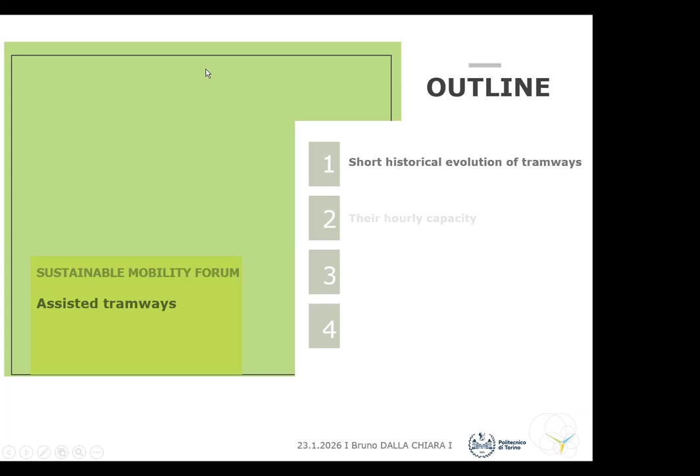First, a very short historical evolution of tramways. Then, as typically in the transport domain, their hourly capacity, then the characteristics of the system, the infrastructure, the rolling stock, and the operation of trams. Last but not least, the recent innovations and latest developments, with a particular focus on energy consumption.

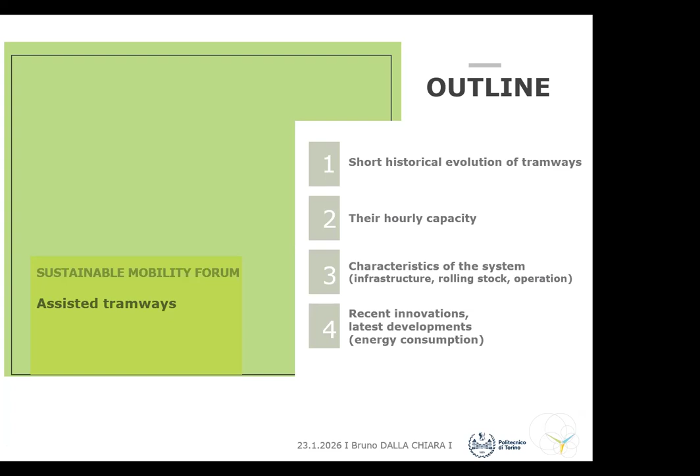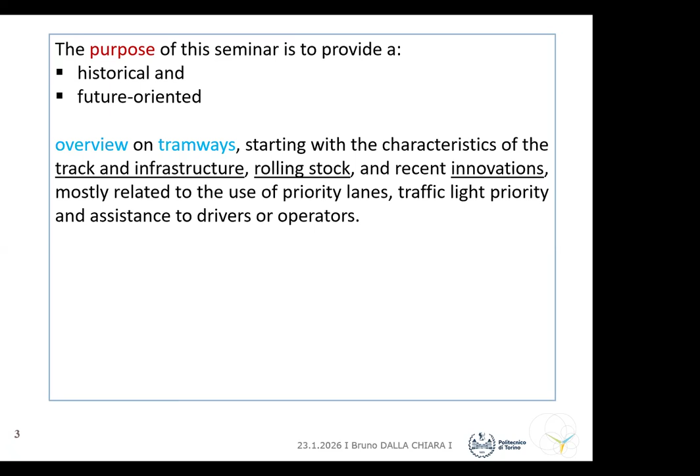So the goal is summarized here: historical overview and future-oriented perspectives, then an overview of tramways starting from the characteristics of the track and infrastructure, then the rolling stock and innovation, the hourly capacity, and some developments.

So let's start with the capacity, and then I will look at the historical aspects, going back to capacity afterwards. This is a slide that I already showed in the seminar concerning automated metros.

Typically, tramways extend for some kilometers, and to obtain the hourly capacity it's very simple, as you most probably know. You have the capacity of a single tram, typically 150, 200, 250 passengers or a bit more. Then you know the frequency, or time between two vehicles, and you multiply the capacity by 3,600 and divide by the interval in seconds to obtain the hourly capacity value.

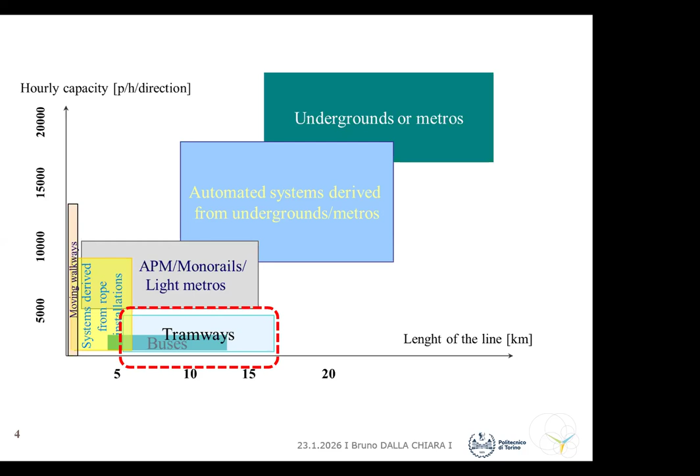That is typically between 1,000 and 2,000, could be a bit more. Sometimes you overlap services, and it seems, from one point to another in the city center, that you have 3,000, 4,000, 5,000 passengers per hour per direction of capacity, but that's apparent, because a single line can only reach around 1,000, 2,000, 2,500, or a bit more.

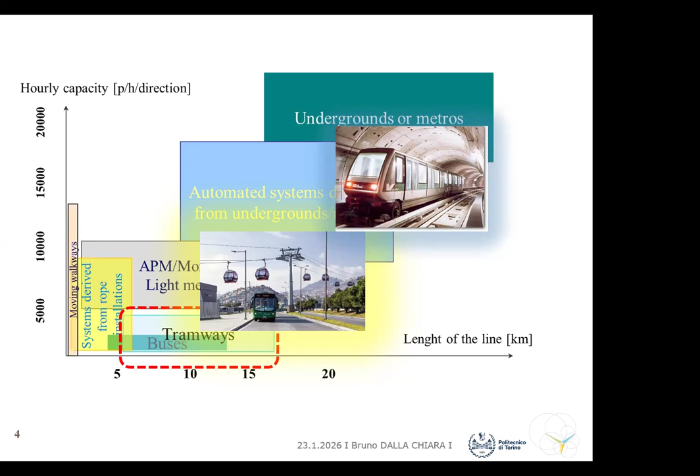Given that, if you want to increase that hourly capacity, you can go in the direction of urban cableways, which you have already seen, or above 8,000-9,000 passengers per hour per direction, automated metros. So more or less you can cover, with fixed systems, the typical hourly capacity of a great number of European cities.

As regards history, the first trams were already in operation in the last 20-30 years of two centuries ago. This is an example, and I will make a number of examples coming from the city where I live, which is Turin, because there is a history and also an evolution.

Within this history, what I want to underline is why tramways were introduced. Well, because the roads were not smooth, they were not planned, they had different irregularities. The proposal was to place rails to have a more regular travel and reduce friction. This could help horses, which had to pull the trams, reduce their effort. This brought, in those years, the development of some urban networks.

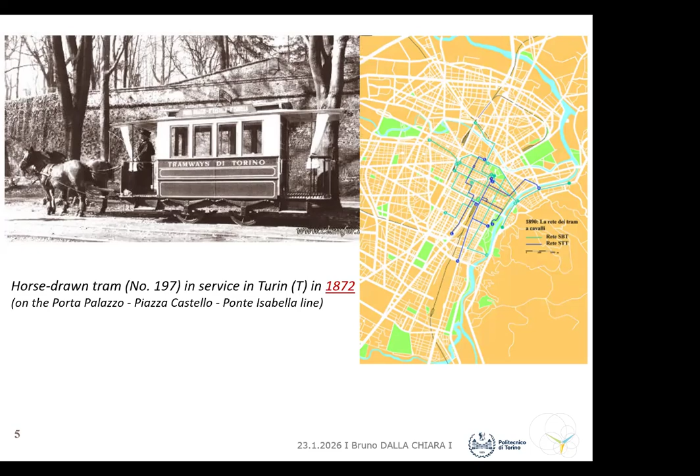This is the one in Turin, a network that in the 1890s already operated with horse tramways, or tramways pulled by horses.

And then afterwards, at the end of the two centuries ago, electrification started. Having rails could help, because you could place the electric line and collect the electric current with a pantograph. So comfort, reduced rolling resistance, and the base for electrification were the foundation for the development of urban tramways.

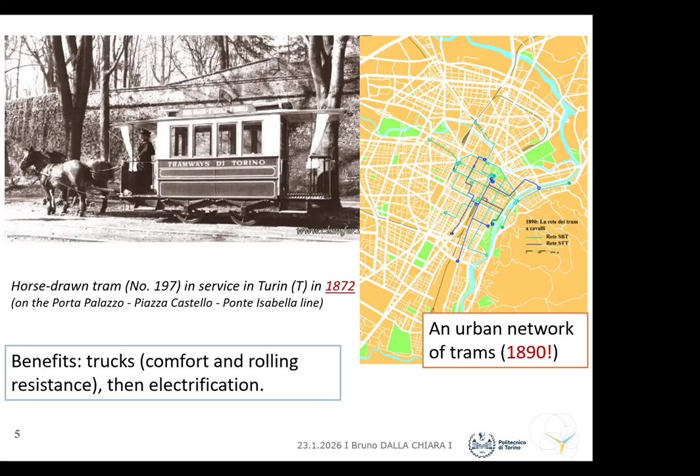Many years, some decades have passed, and nowadays we speak of both traditional, conventional tramways and fast tramways, where the typical features of fast tramways are segregated lanes and, as far as possible, traffic light priority.

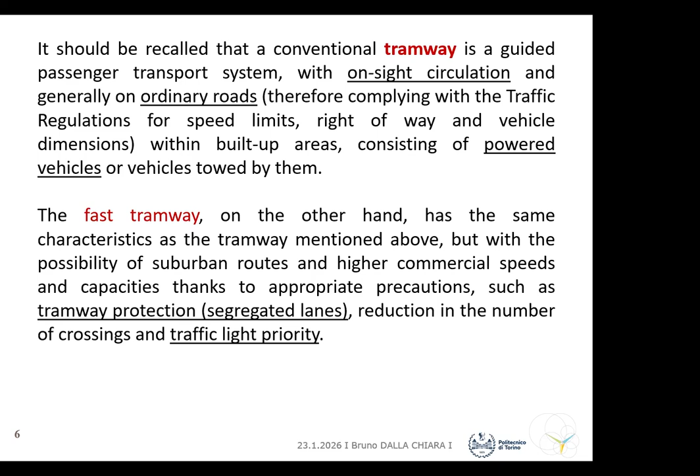Given that, there are a number of technical standards, mainly referred to CEN, the European Committee of Standardization, Comité Européen de Normalisation, which partially share the same rules or technical features as railways, but typically the technical standards concerning tramways are specific to tramways, and that's all.

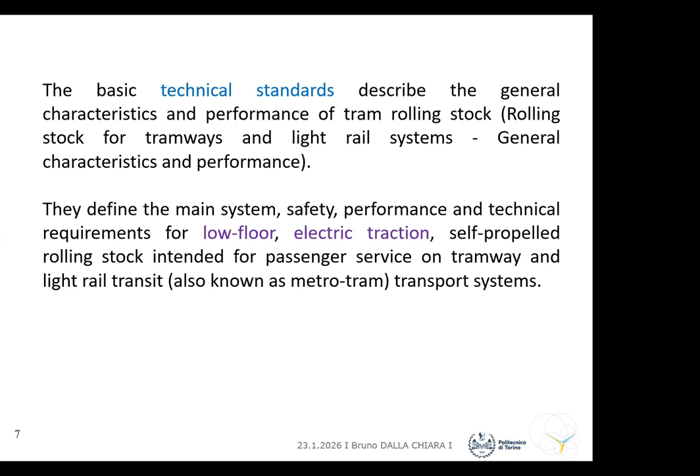They concern low floor, electric traction, and resistance of the vehicle, which we will see soon. So I've summarized this so that if you have to deal with tramways, you know the basic technical terms.

So I've summarized all the European standards concerning tramways. Some of them, as I said, come from railway application, but with specifications for trams. I won't list them all, but I'll just mention there is a standard concerning tram vehicle layout, then displays, controls, indicators for tram vehicles, and design for trams and light rail vehicles.

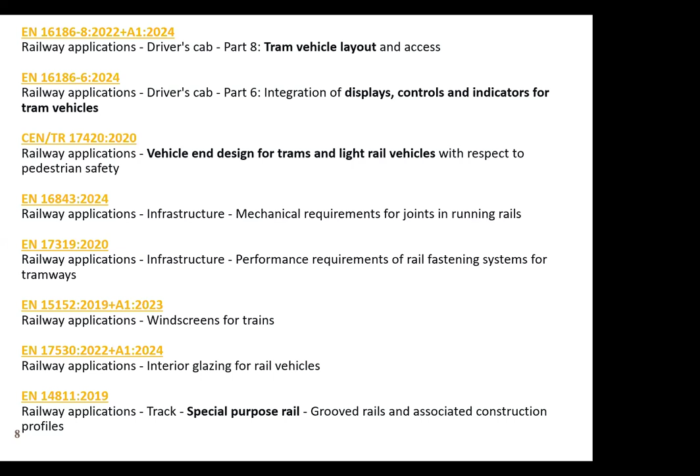Then something related to the mechanical requirements for joints, the performance requirements for rail fastening, windscreens, interiors, special purpose rail within which there are grooved rails for the tramways. And then there are some technical standards concerning switches and crossings, urban rail application of railways, also for the tram train applications, of which I will tell you something later.

Then a communication device for urban rail, the track during the work, and last but not least, MaaS, Mobility as a Service, which has a standard NeTEx, which includes also the network and timetable exchange for trams, for knowing what is the supply of services of tramways together with all the other urban services.

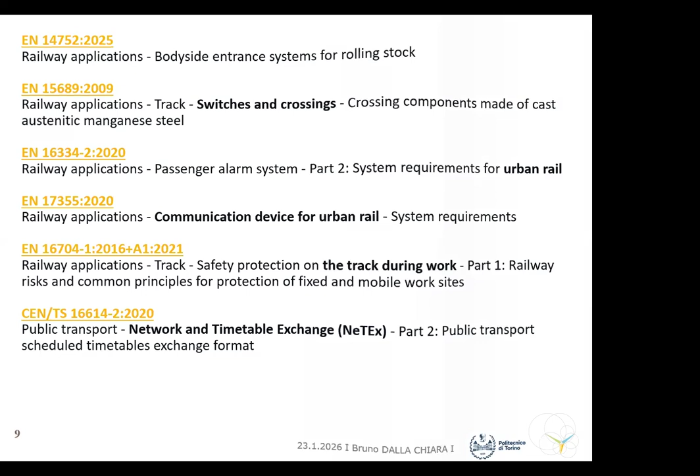So this is the list of technical standards concerning tramways. There is a consolidated literature and consolidated standards. Given that, let's see first of all which are the main strengths of trams. Then we will enter into more technical aspects.

The strengths are, well, the hourly capacity is interesting: 1,000, 2,000, 3,000 passengers per hour per direction, as I said before. And it's much more attractive than conventional buses. And if you have a segregated lane, this guarantees, to a certain extent, that you can maintain that hourly capacity without the influence of traffic flows.

Then, of course, the regularity of the lane, having some rails at disposal, guarantees the passengers can carry on some other activities like reading, like using their smartphones or whatever, while traveling. Then the frequency - if you have enough drivers and a good network, then you can guarantee a regular frequency of the service. That is something interesting.

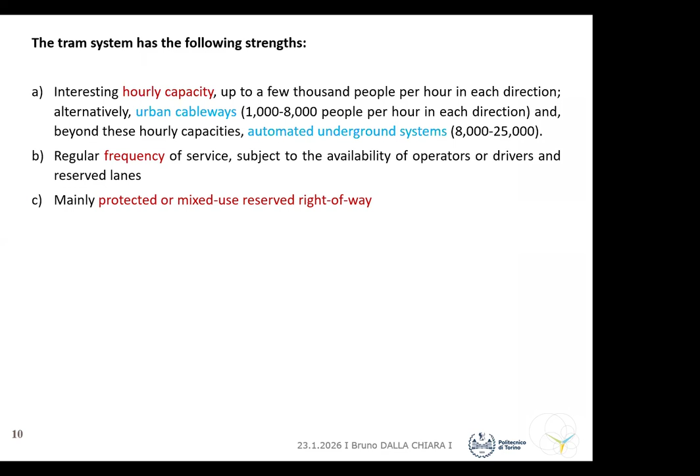Then you typically, well, cities typically aim at protected or mixed-use reserved right-of-way, so segregated lanes. It doesn't produce local emissions because all the tramways nowadays, typically or nearly all, have an electric line. Well, there are some tramways with rope traction, as you may remember from San Francisco, or some specific application, but typically they are all electrified with an electric line and a pantograph.

And then typically an easy accessibility and a creation of a positive network effect, because you can have switches and you can cover parts of a city. Then you might have an effective traffic light priority, of which I will speak later, and this guarantees a higher, typically commercial speed.

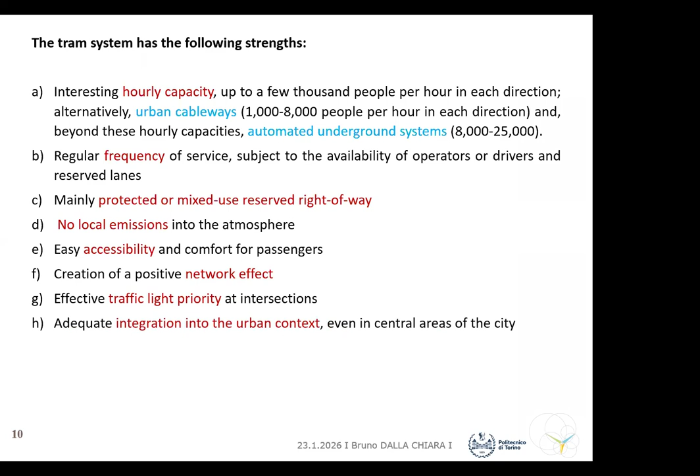Then you can integrate the tramways with the urban context, especially in the central areas, as we will see later. And typically you have segregated lanes as far as you can with a clearly visible route, therefore less risky for pedestrians. It's not always like that, but could be.

And then you have the possibility of recovering energy during braking, though it's not so easy for tramways as for trains. We spoke about that when dealing with automated metros. And anyway, you could do it and part of the energy will not be lost.

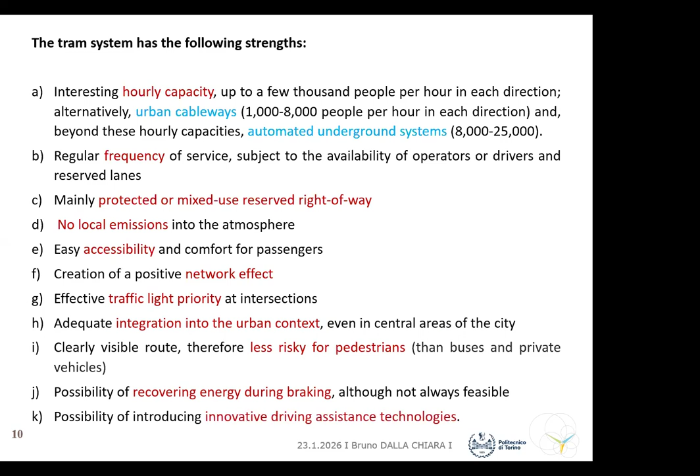Given that, let's start from the infrastructure. Maybe you remember that the typical standard gauge of railways is 1435. That is the normal gauge that was inherited from Stephenson at the beginning of 2 centuries ago. But the tramways have not the same railway gauge.

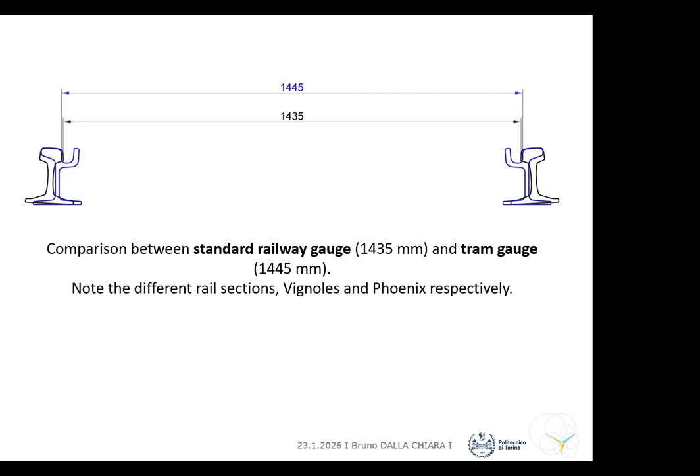As regards the running track, we have various gauges apart from the standard one that we have just seen before. So 1445, I go back, this one. Okay, apart from that, we might have the narrow gauge of 760 millimeters and pseudo standards.

Typically, we can have very reduced radii. Consider that in railways, typically the radius of a railway line has a minimum of 150 meters, but this is not typically accepted along the infrastructure. And normally we have railways with more than 250, 300, 350 meters of radius. In the tramways, you can reduce that, given also the kind of infrastructure you have at disposal.

Then you can have a gauge widening on curves, typically on very narrow curves. Then you avail yourself, the line can avail of switch points, and you can activate track switches from on board, typically of the vehicle. The rails are Vignoles or Phoenix, and we will see later, typically grooved.

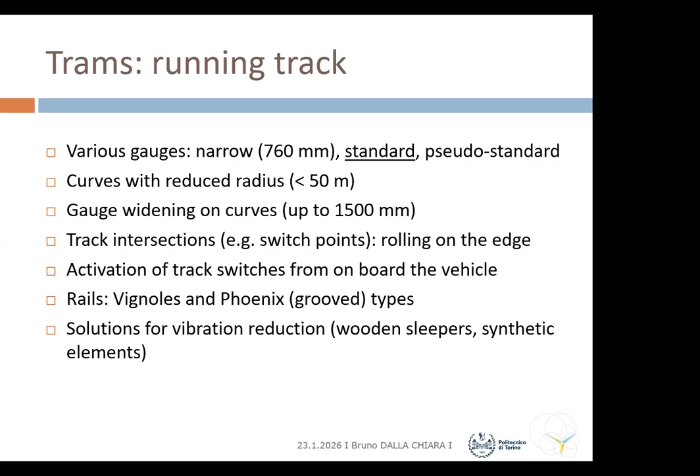And there are solutions for reducing the vibration, typically wooden sleepers or synthetic elements for absorbing vibrations. Here, sorry, there are some slides that are in Italian because I use them in my courses, but though some of them are in English, but these are in Italian. These are typically Vignoles rail.

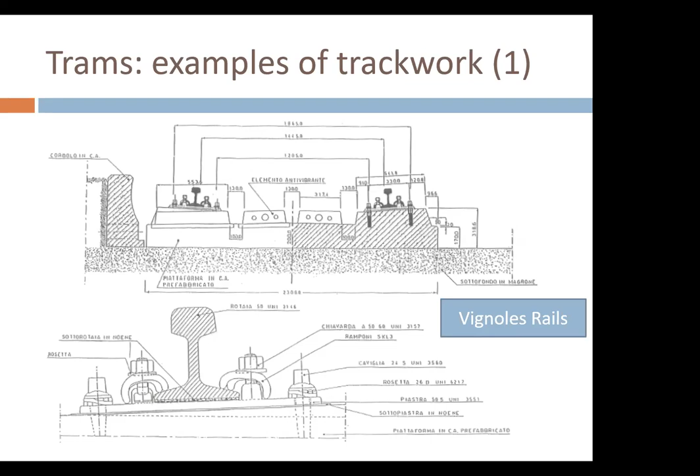What I underline is that you have, as you may distinguish underneath the rail, an element for absorbing the vibrations, or in between the rails, as you can see here. As regards this application, it is very similar to the railway one.

As regards typical tramways application, we have Phoenix rails like this, and they are much applied in many cities. As I said before, they are very good for very narrow curves because the body of the tram remains there and cannot get outside unless for unexpected conditions of dynamics.

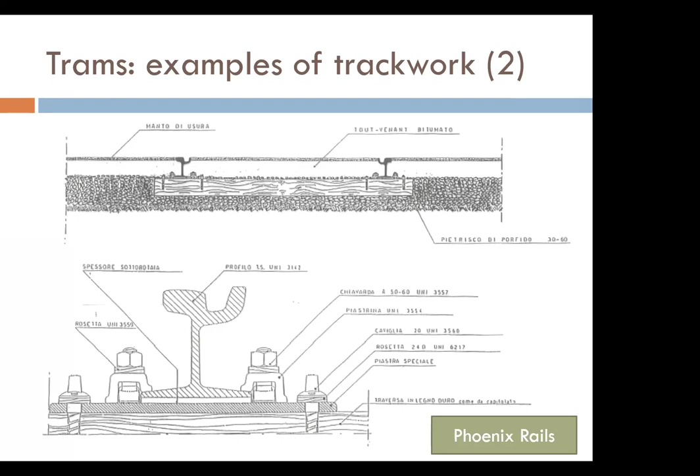As regards the layout of the track, here I have reported some designs and sections of possible lines in the city. You can have the tramways close to one another with the electrification on the extreme parts of the carriageway or in between. Or you can have the carriageway where the tramways run in one direction and the other at the extremes, with the lanes for cars or passengers in between.

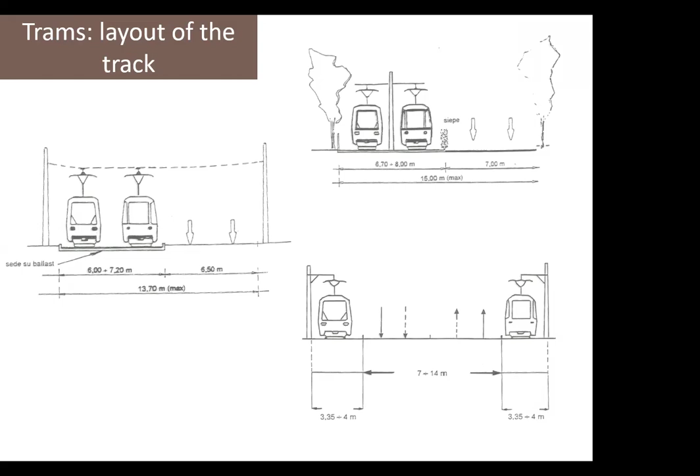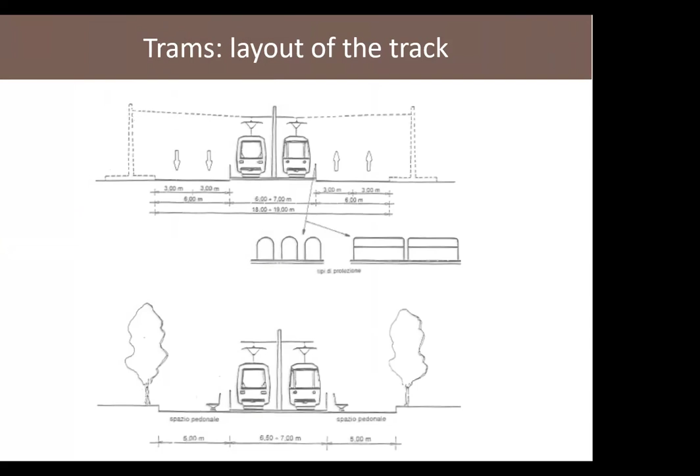Or you can have it in between, but in a specific context, typically where you have passengers apart, like in the picture below. So you have parking areas or areas where people typically walk, and the tramways in between.

As regards the rolling stock, in the world, conventionally, we have three types of trams with 2 bogies, 3 bogies, and 4 bogies. Only recently we have longer trams, up to 6 bogies, but the conventional ones are typically these. A little tram typically has 2 bogies, like the one on the top left of this slide. Or you can have a 3 bogies tram like in the bottom part, or 4 like in the real bottom part of this slide.

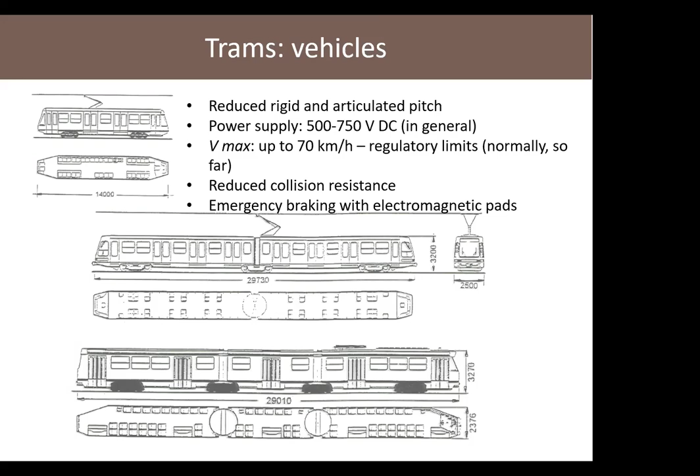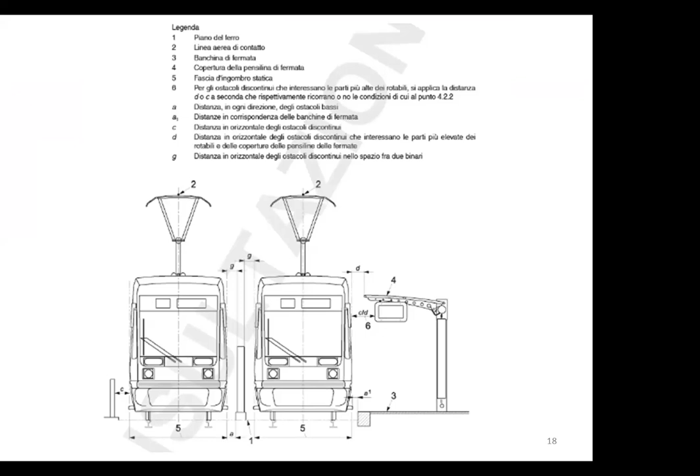But tramways normally have them, because they work and operate in the city. Here you have a section of line where you can distinguish the pantograph, the section, and the front and rear of the tram. Let's see some pictures, and then we will go towards the technologies.

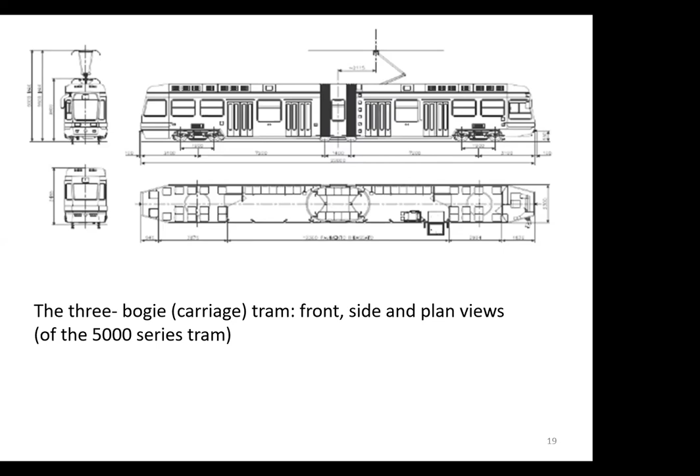As regards the pictures, here you can see a 3 bogies or carriage tram, with the front, side, and plan views. Forget the number here, it's just an application concerning Turin and some other Italian cities. You can distinguish that typically you have 2 pieces connected together in the intermediate part, and the bogies that you can see there. The number of doors depends on the kind of design.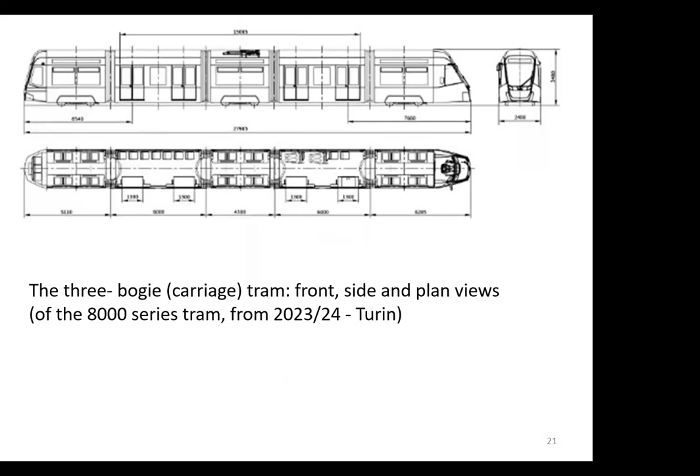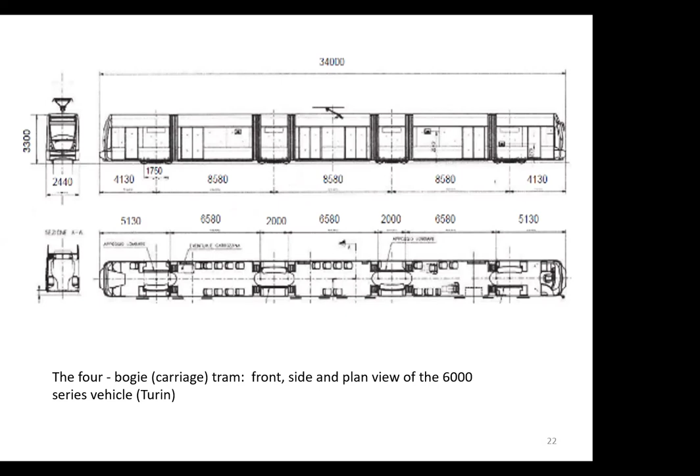Here you have another 3 bogies tram, again a similar concept. And another one. This instead is a 4 bogies tram, which is normally the longest one, apart from some very recent experiences that we will see shortly. In a tram like that, you can host something like 250, 270, even nearly 300 passengers, so you can easily calculate the capacity given the time or the headway between 2 trams.

More recently, the first electric tram in the experience I showed before, that is Turin, was introduced in 1899. There is more than 1 century of history, and nowadays we have trams like this. I've taken as an example a German one from 2024, a very interesting tram with 312 passengers, 92 of whom are seated. The axles are motorized, which allows for the overcoming of major climbs.

Here you have 16 asynchronous motors with a total power of 880 kilowatts. I don't know how confident you are with powers, but typically this is the power of, for example, a locomotive that you can use for marshalling yards in the railway field.

So comparing, here we have a tram which can arrive, in this case, at more than 70 kilometers per hour of maximum speed. It arrives at 80.

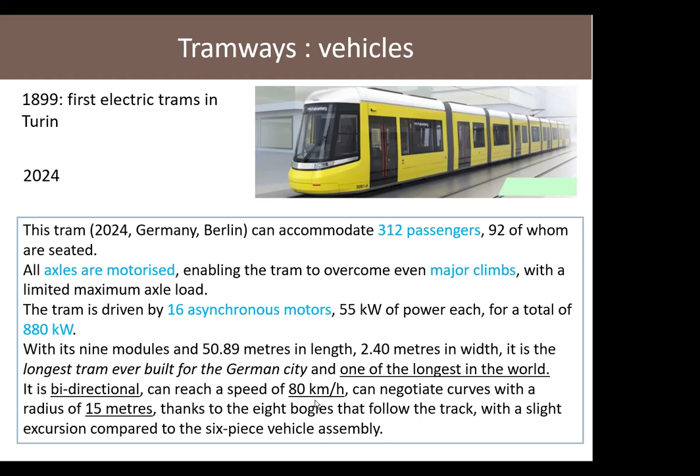And interesting power. Well, this solution is one of the longest in the world and can negotiate curves of 15 meters. That is something interesting because typically in the cities you might have to turn with such short curves. And it's bi-directional, meaning you don't have to invert on switches, but the driver can just change his position and invert the motion of these trams.

Some other features: it allows, as I said before, energy recovery. But in this case, it's not given back to the line, as we saw for the automated metro. Just recall that in the automated metro, typically having an electric motor, you can recover energy and give it back to the line so that another convoy can use that electricity for accelerating. And this is something very interesting.

In this case, you don't give the electricity back to the line, but you recover it with high-performance capacitors on board, so that you recover that energy in the capacitor, like in a battery, and you can use it again for subsequent acceleration phases. This is what is made nowadays in cars with hybridization, where you have the electric motor, the internal combustion engine, and a battery, so when you reduce speed you use typically the electric motor, recover energy for storing it in the battery. This is similar to some extent.

Then this vehicle can travel without electrification for up to 1.5 kilometers without contact line, thanks to these batteries. And so this is an example. I took one of the few in the world that is very up-to-date and modern. We are not speaking yet about technologies for the driver and energy, but again, as regards the mechanical and electrical parts, this is something interesting.

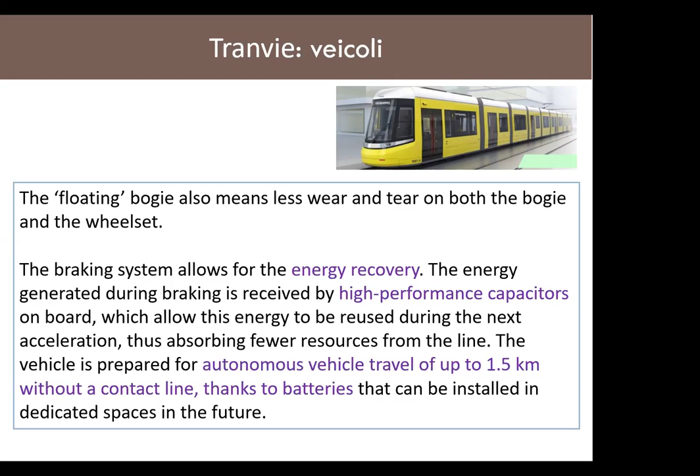It has also some floating bogies, so that it allows for very critical curves in cities. Just to recall one aspect that maybe you know from other seminars or from your experience, that is the instability during rush hours.

A very practical example: if you go to the bus stop or the tram stop, it can happen that you wait for a long time and buses don't arrive, trams don't arrive, then a bus arrives and soon after another one or other two, and the same for trams. The same can happen also for conventional metros.

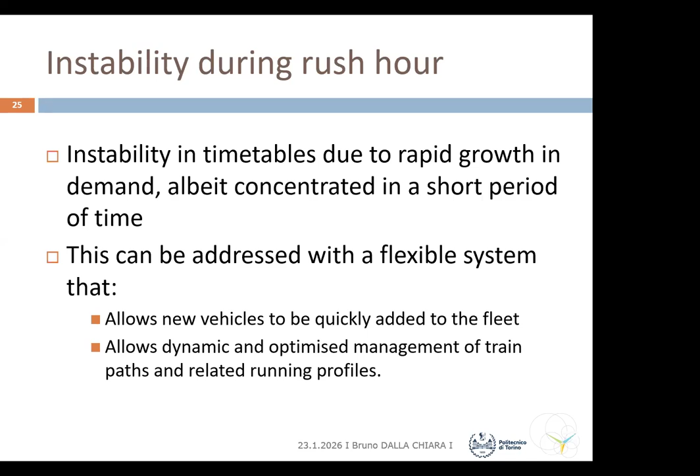Why? Because of this: if you increase the time at the stop, as I mentioned already for conventional metros when I made that seminar, this means that at the subsequent stop you will have more passengers typically if they have a certain distribution in time, and this will increase the stop at the subsequent stop, and so on. This will make the delay wider and will accumulate vehicles.

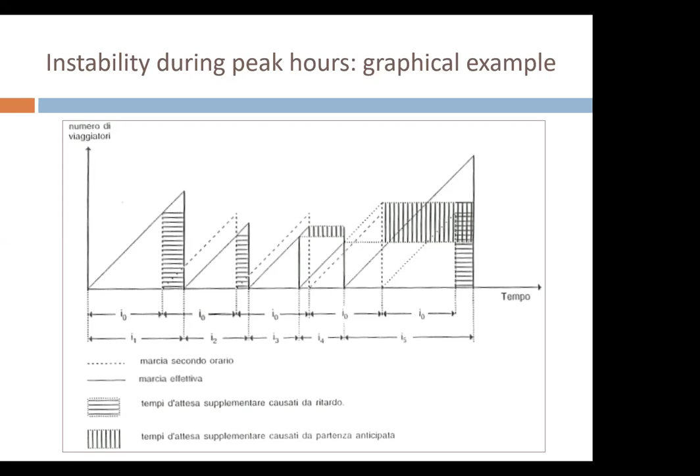Well, why do I recall this aspect? Because if you have a segregated lane and if you have technologies that you can nowadays apply on tramways, you can recover this at least to a certain extent, though full recovery can be made with fully automated systems. But anyway, to some extent you can do that. And let's go towards the innovation.

Well, some innovations are related to the fact that tram-train rules have been introduced in some countries, like Germany, Italy, and France. This implies having a train which has some features more similar to a tram: just one driver, lower resistance than that of the train, as I said before, and it can travel along an urban line.

But if you have an infrastructure where you can allow trams with the appropriate gauge and electrification, typically in the tram-train solutions, we separate the timetable of the trains and that of the trams. Otherwise, you have some rolling stock that is suitable for both lanes.

Then most recent tramways have modularity of vehicles so that you can make them longer or shorter according to the needs. And a typical application related to the use of intelligent transport systems is like traffic light priority.

Traffic light priority means that you can localize the tram and have it under control with a supervisor of the traffic lights. According to the position of the trams, you can provide a longer green wave or green phase for the tram when it is close to the intersection, to guarantee the green. Then, in the subsequent phase, you give back that extended green to the other flows, so you try to avoid accumulation of queues.

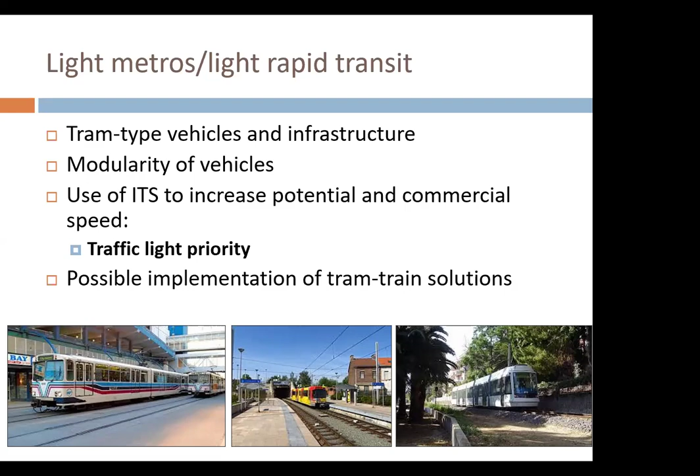I've used this picture to show you an example of traffic light priority, referred to Turin. I tested myself with my watch, counting the number of traffic lights along a certain origin-destination path, and you can obtain something like 80%, even more, of green phases given the traffic light priority, but at the condition that you have a segregated lane.

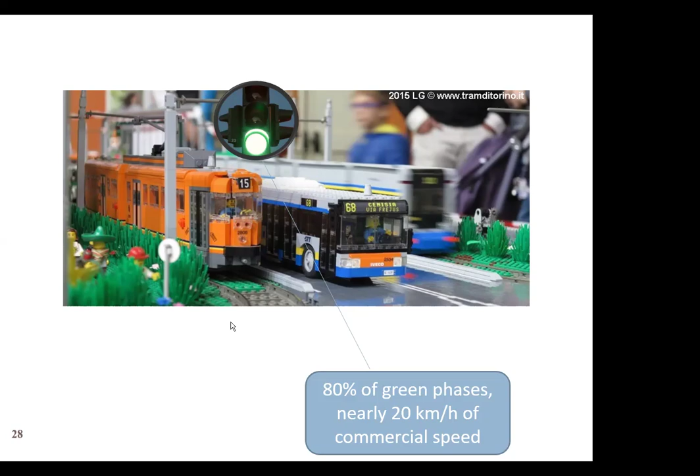This means you can arrive at commercial speed. I'm sure you know what commercial speed is: from origin to destination, including stops and possible delays along the line - distance divided by time gives the speed - and you obtain a speed like 20 kilometers per hour. That's a very interesting value for commercial speed in a city.

Let's take some examples to understand what can be done with tramways nowadays. Here is a survey made again in Turin, showing different drivers - the different curves you can see, with time on the x-axis and speed on the y-axis. So you can see how different drivers with different experience may have a different speed along a line.

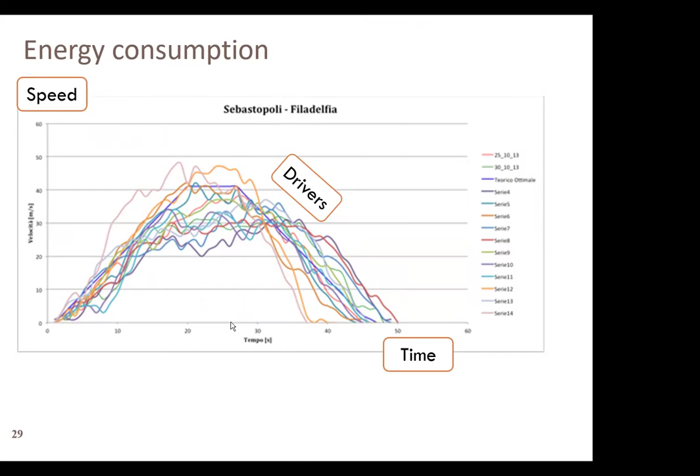But given that, if you have a supervisor - and this is an example of part of the supervisor system in Turin - you can know the position of the trams, especially, or much preferably, if you have them in a segregated lane, because they are not disturbed by normal private traffic.

Then you can guarantee the green light according to their position when they approach the intersection. Of course, it also depends on the position of the tram stops, because it could be far away from the traffic light or close to it, so you have to consider that too. Typically, you give some more green light to the other flows, not just the tram, and provide an extended green phase to the tram along its traffic flow, then, as I said before, give back this extension afterwards.

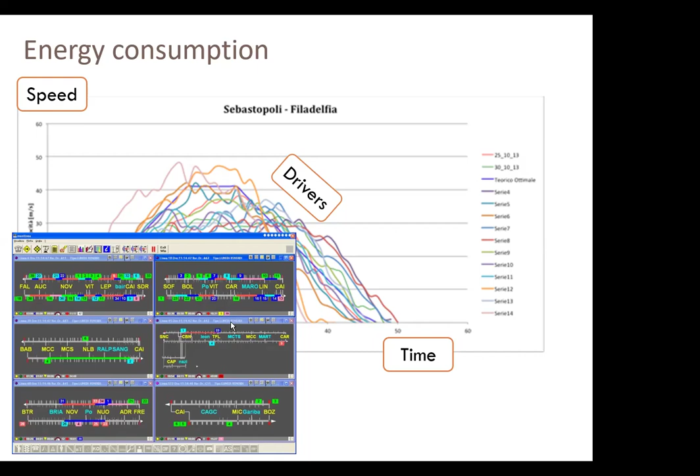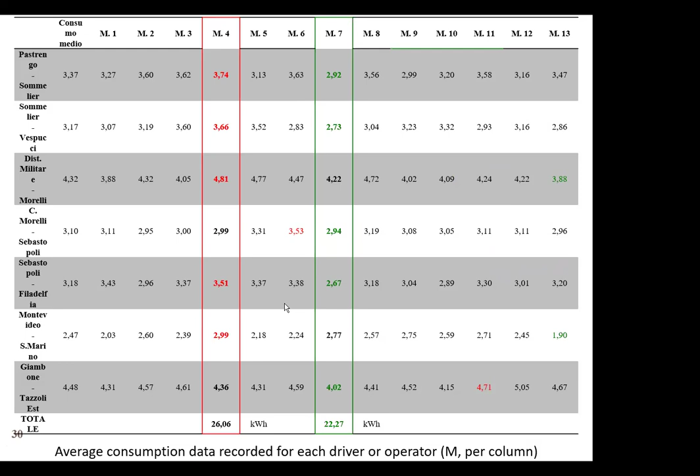So what can we do with that? We can obtain some numbers - I've reported some experiences here. According to the different sections, you can analyze the energy consumption and the effect of the traffic light priority. Using these numbers, you can see that having the green phase available for the tram guarantees a reduction in energy consumption that is not irrelevant.

Why? Because the greatest part of the energy consumption is associated with the acceleration phase of the tram. Once it's traveling at a certain speed, the energy consumption of a tram is very low, because of the steel-on-steel contact, which doesn't imply great resistance - that was one of the origins of tramways. So if you don't accelerate, decelerate, accelerate and decelerate frequently because of stops or traffic lights, this provides a great, sensible result in terms of reduction of energy consumption.

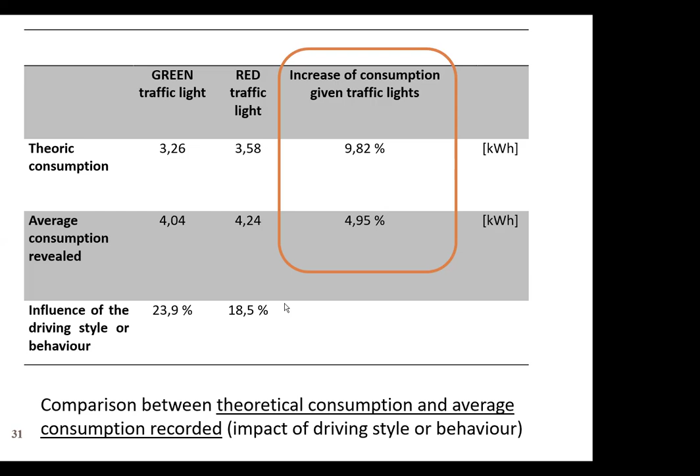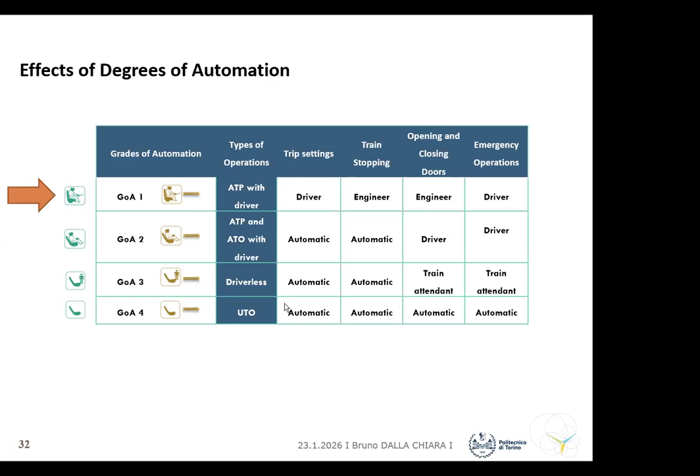The driver can be assisted or not. So far, tramways have not been much considered in this context. Metros have been, with automated metros. Trams typically have a driver. But in recent years, as you may remember from the seminar on automated metros, and the grades of automation - GOA - an automated metro has GOA 4. Well, GOA 1 has appeared in tramways. You still have a driver, but the driver is nowadays, or can be, assisted. Some tramways in the world now have this GOA 1 application. Here I have reported this picture from literature on current and future system usage and improvement concerning automation on board.

You see that we are at GOA 1, but we are addressing GOA 2, GOA 3, and GOA 4. It's difficult to reach GOA 4 in tramways because you cannot segregate it at all, since typically it operates in the urban context. But anyway, step by step, a higher level of GOA is under application.

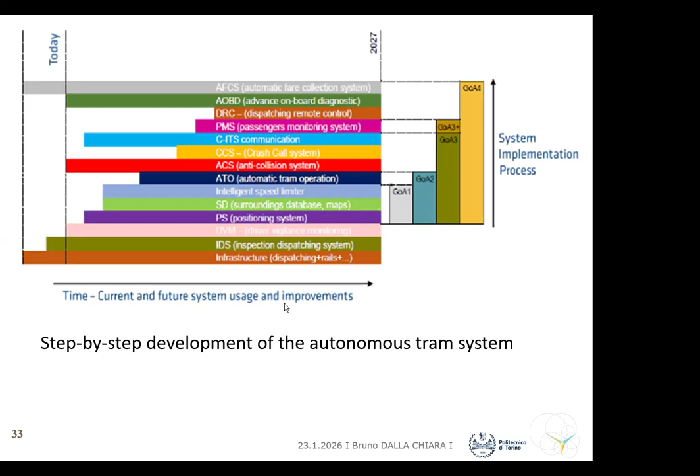As you can see, the ATO, which we spoke about in the metros, and ACS, the anti-collision system, then the CCS, the crash call system, are typically applications under research and first applications nowadays. There are also applications concerning the insertion on board of radars and lasers, anti-collision systems to help the driver in case he doesn't see a sudden obstacle appearing along the rail lane, helping in terms of safety of the travel. These are very frontier applications on which some tests are undergoing.

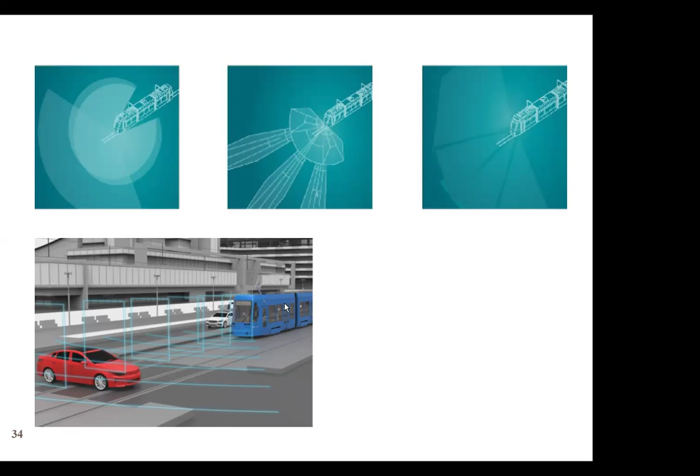Well, this seminar is a bit shorter than the previous ones because I wanted to make a very vertical analysis on the recent applications of tramways and leave some more time for the discussion.

What I can conclude for the time being is that tramways are still alive and kicking, notwithstanding they have more than 160 years of history. And notwithstanding the fact that they were born for reducing the resistance with the rails for the horses, these rails still remain, and they have a role in terms of comfort. That was one of the reasons, but now it becomes important. And they have a role because they allow for segregated lanes, and tramways are still interesting.

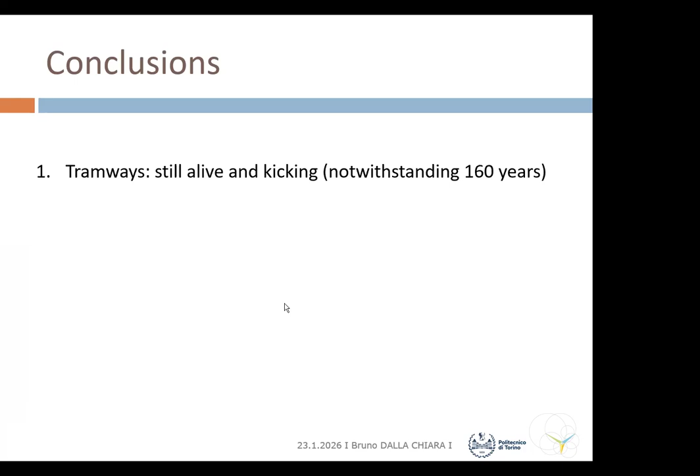Of course, they have some thresholds typically related to their hourly capacity, because you cannot arrive to more than the numbers you can see here, 3,000 passengers per hour per direction. Just to make an example, well, it's very simple.

I take my smartphone. You can write, for example, 250. You divide it by, let's suppose... 120, sorry, a bit more. You can have a tram, for example, each 300 seconds, no, 120 is too short, 300, that means 5 minutes, multiplied by 3,600, okay, that's the maximum. That means it makes 3,000.

What does this mean? If you have a very crowded tram, modern, with 4 bogies, and you can have one each 5 minutes, this is the maximum capacity, 3,000, that I've written in the slide you can reach. Sometimes there are advertisements claiming 5,000 passengers per hour per direction with these tramways.

Not believable, unless, as I said before, you might have some lanes that are overlapping. So one origin and destination, another origin and another destination, but in the middle part of the city they're overlapping, and so you can reach higher values than this. If you need more hourly capacity, you can address urban ropeways and automated metros.

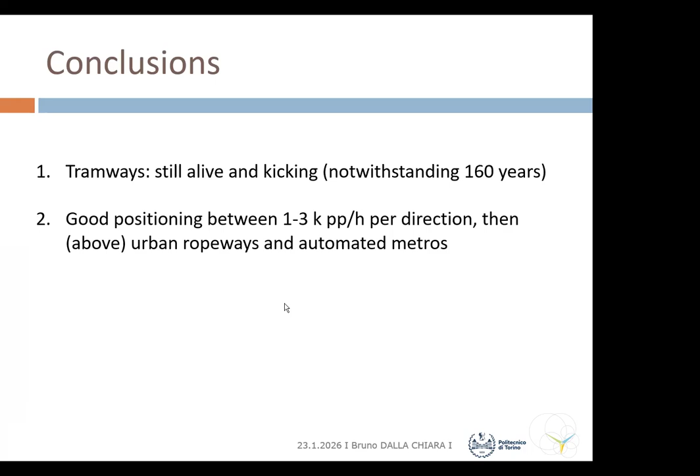Then segregated lanes are something much important. They were not so pursued in the 70s, 80s, and 90s, but from those years on, many cities have reduced the capacity for private traffic and increased that for tramways, allowing for segregated lanes with traffic light priority. But traffic light priority is not immediate. There are both local instruments, meaning the trams ask for the traffic light priority. This is typically applicable for low levels of traffic. But when you have an important city, this is not feasible, and normally you have a supervisor.

For example, the one in Turin is called Utopia. The supervisor, with inductive loops and with the localization of public transport, knows the traffic flows and knows where the trams are, also the buses, and according to that applies strategies for reducing the levels of traffic in the city, and when the trams arrive, gives priority to them.

Another evolution is that of GoA, as I said before. That means the grade of automation that nowadays is just at level 1 and is evolving towards level 2, possibly 3 one day.

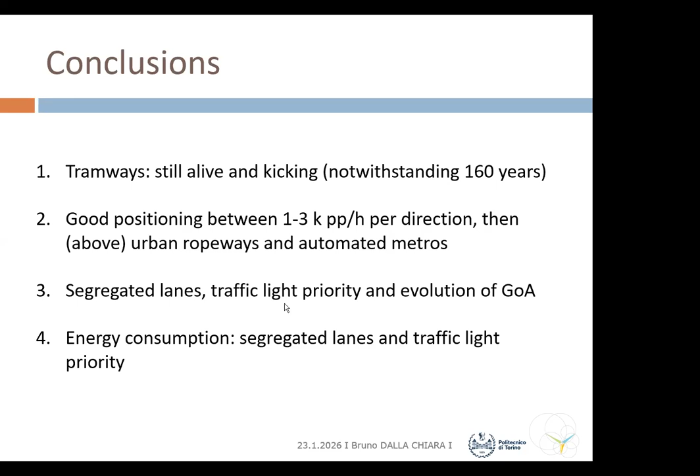As regards energy consumption, segregated lanes and traffic light priority have a great effect, as I've synthetically explained before. This is important because of the high attention nowadays towards energy consumption and emissions, which we don't have, apart from some particulate matter, but very little from tramways. The energy consumption is very interesting because it's a typical energy consumption of a train, but lower, and a bit higher than that of cableways, which I spoke about in a previous seminar.

That's all, and there are some minutes for questions. I've been a bit shorter than previous times, but I'm available for answering your questions.